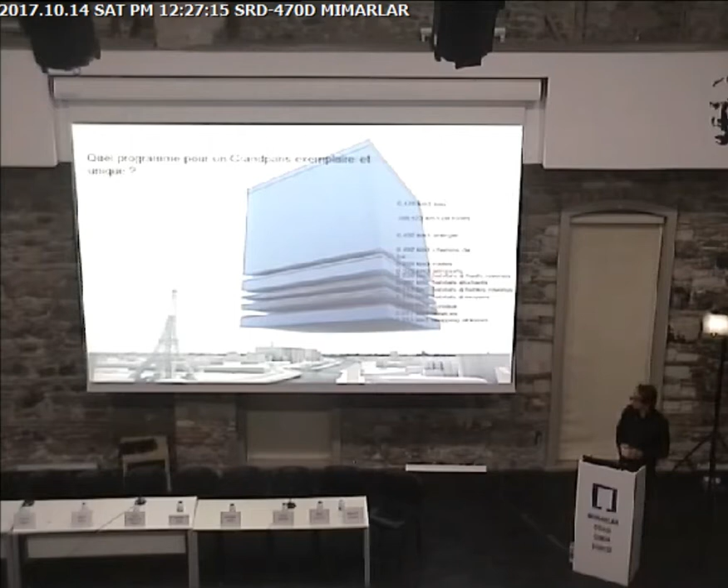So Sarkozy, the former president, came to us once to think about the expansion of Paris and what that could mean with 1 billion square meters of extension. Well, that's a large question, but it's maybe very relevant in your own context here.

So these were just a couple of suggestions, and then I thought further, what are other iconic buildings? Of course you have the Opera House in Sydney, or in Amsterdam we're trying to become iconic with this film museum and the former Adam Tower.

But actually Amsterdam, the urban fabric, as you showed before, I think it was you Meindert, is an icon in itself. So iconicity, or we make icons, you know, we create icons. Amsterdam is marketing 'I Amsterdam,' so you could definitely question what the icon means.

And in that context we're now talking to the municipality of Amsterdam to create another icon, which is a high-rise with the kind of symbol of the city. It's very bold. I'm not going to explain why, but it's interesting in this context to see if this will ever become the built icon of Amsterdam.

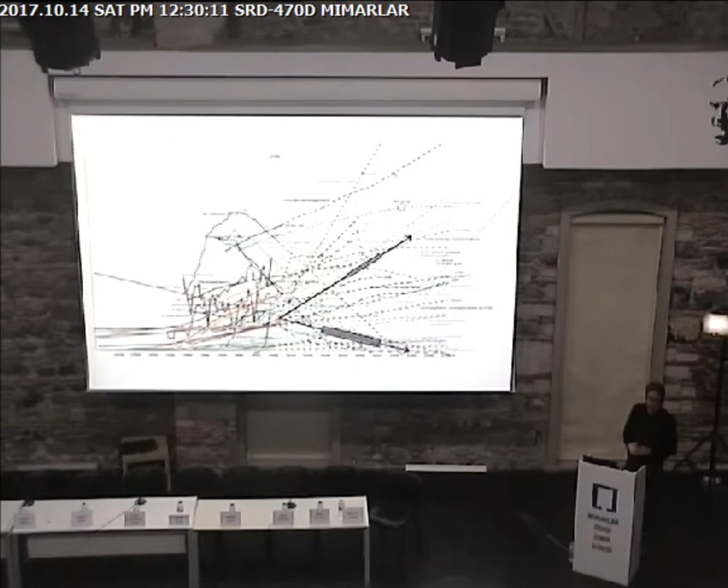I have to tell you why maybe we are making icons, and I think it goes back quite a while, where we did some research about what is happening to Earth in a way. If you look at the two arrows, what's going up is population growth, but what is going down is our resources, of course. So we are all aware of that, and in that sense that is a trigger to work with densification.

If we have the Earth and we all would live like a USA citizen, today we would already need almost 4.5 Earths. So that's part of a question mark for us, first of all to do research within densification and icons, and secondly to do projects that are based on it.

So we ask ourselves these bold questions like, what do we need to live actually on Earth, and how can that influence in the future perhaps a datascape of the built environment? Does the need for resources create our landscape or our datascape?

And more practically related to this is maybe the library issue in Holland, where there are so many scattered libraries over villages, and books are not being read that frequently anymore. There, let's say, there are copies of books everywhere, which is in a way an inefficient way of having them. For the province of Brabant, we once did a proposal to collect all the books and make a Brabant library, creating in a way an iconic building.

This is research, this is not a project. Sometimes renders are a bit confusing.

Similar to the pig city, one of these big questions for the Netherlands we're dealing with—we have more pigs than people, and they're all stuck in farms living in 1 square meter environments. So we did research on what if we have the inhabited pig city, which actually offers a living environment for this animal 5 times as large as in existing urban farms. However, yeah, well, that's it.

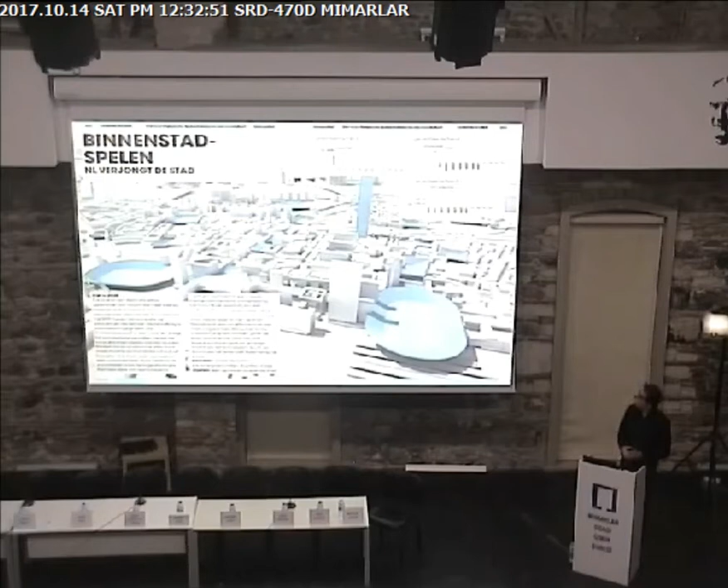Related to this rapid growth, architects working nowadays are confronted with large questions and large buildings, and clients ask you, can you make an iconic building for me? At the same time, the money is made in these kinds of developments all over Asia, which was a trigger for us to deal with its program, its questions, and to see how on a large scale we can diversify and mix and test what these kinds of programmatic uses can become.

This is just a study, but on a finer grain, one could say when you look at an urban fabric on a smaller scale, an icon is maybe one household, and it can be a collection of buildings. So this installation of the vertical village in Taipei is kind of a suggestion on how we can deal with densities. Do we really need to stack? Do we really need high-rises, or can we just densify in another way?

So I show you one project which is, I think, the iconic village. And of course we all know in China villages are wasted away, and you have now and then a stubborn person stuck there, but you could really question if the city districts are very livable. So one of our projects is the Bund in Shanghai. It's a very well-known location, situated between the upcoming CBD on one side of the river and the village life on the other side, with the site exactly in the center.

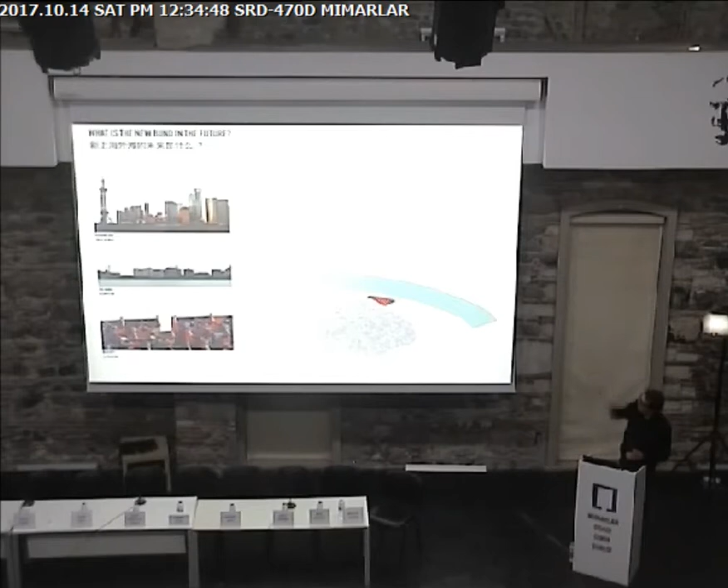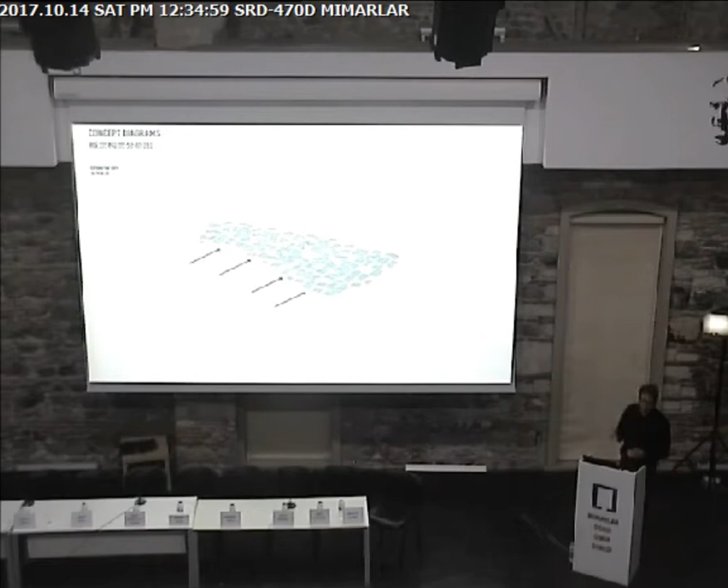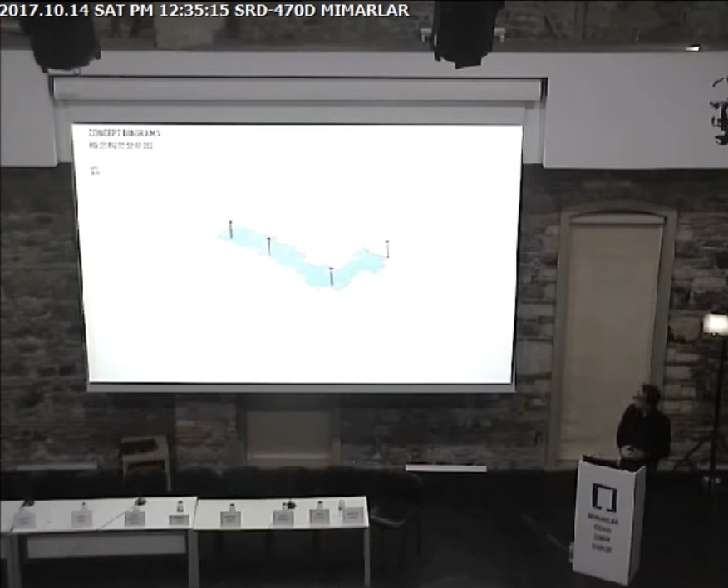Our approach was, can those two marry actually? Can we extend the village? Well, it doesn't give you the amount of density that is needed. But in a way, why can't you densify the village, and maybe extrude it, level it up, where there is of course a limit for daylight restrictions. So we might have to split and have a double village. Here we have a kind of marriage between the high-rise as we know it and the urban fabric on the other side. And of course this gives a spectacular view.

This was a real project. It was not a research project, but it became a research project because it was never built, for many reasons. But imagine city life like this.

So I go to another location, Jakarta. Jakarta is a city which is also rapidly expanding in many directions, and it has over 15 million people. So within Jakarta, we looked at what Jakarta consists of. It consists of different neighborhoods, kampungs, as they call it.

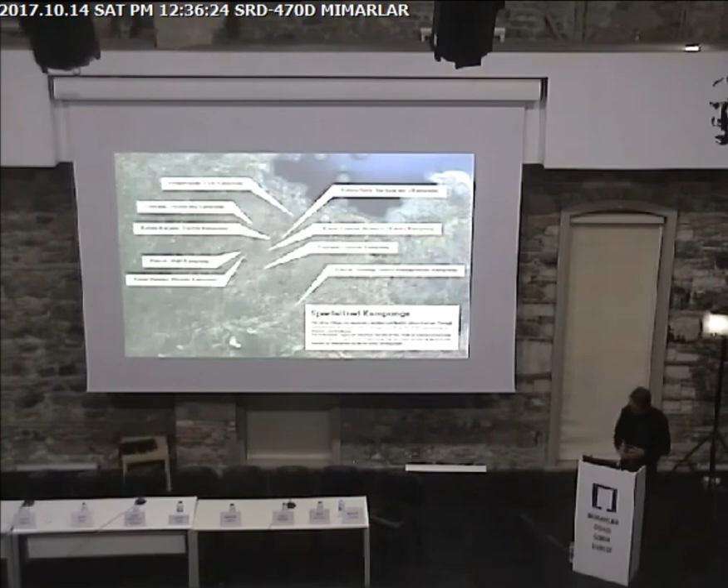So there is a fish kampung, which has its own microeconomy. Basically, it's a carpet, a tapestry of microeconomies. In the context here, this is their location. But in the context of Jakarta, there's also this redevelopment of the city with high-rises, etc., and that's what redevelopment is at the moment. It's replacing the urban fabric with its microeconomy. Here you see how they collide.

So we did 3 projects. I'm gonna ask you how much time I have still. Enough? Okay.

One is a vertical village, so city. So I was thinking, did we ever make an Eiffel Tower-like project? Did we ever propose it within the urban fabric, an existing urban fabric? So this is one of the proposals we're working on right now, which is a 450-meter high tower, a collection of towers. And I'll tell you why it is maybe justified to do this.

The former money printing company of Indonesia was based on this site, and it's secluded by large main accesses of Jakarta. When we looked at the site, actually there was no monumental value, only the headquarters of the money printing company. And as you can see, by regulation we already had to make an offset, so we would create a larger green zone. In the surroundings there are multiple buildings, there's a police station, there are multiple governmental buildings. So that's kind of the context we had to work in.

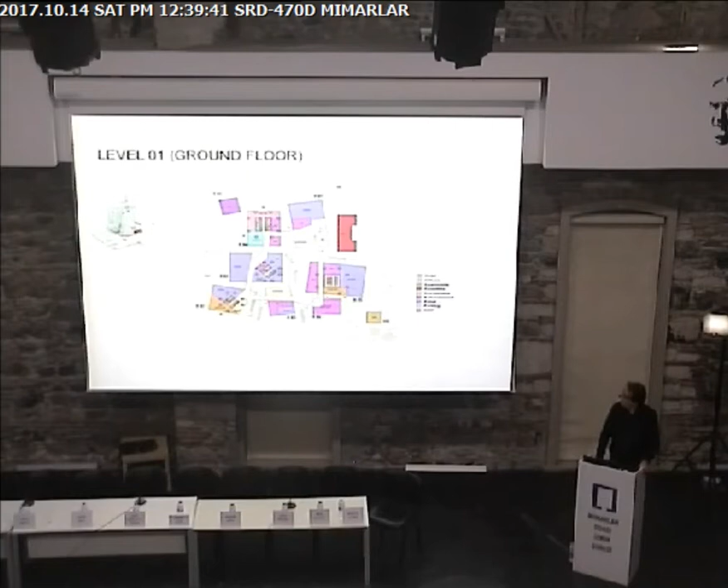And of course, we landscape the site. When you look at the roof plan, this climate fortunately allows on higher altitudes, as we know in Singapore very well, to have roof gardens. This is, I have to say, a vision. It's a first start of the project. We'll see where the budget brings us, but these are some impressions.

A tilted element, which is the cinema. But of course, this is a first attempt at a slightly finer grain of large-scale development. This would be open to air, the central plaza, and when you look up, you see how covered and shaded it is. It's a cinema complex higher up, with a diversity of housing typologies.

And from the hotel, one could look down. So this is maybe the kind of a radical proposal within an existing urban fabric.

So I would like to compare it a little bit with our second project, which is the Kemang, which is the vanishing village. It's somehow more refined, and I'll show you what was the trigger. We were actually in a kampong, in the middle of a kampong in Kemang, and it's a very lively neighborhood, very much appreciated by locals but also expats, and it has a huge variety of destinations, as you can see here.

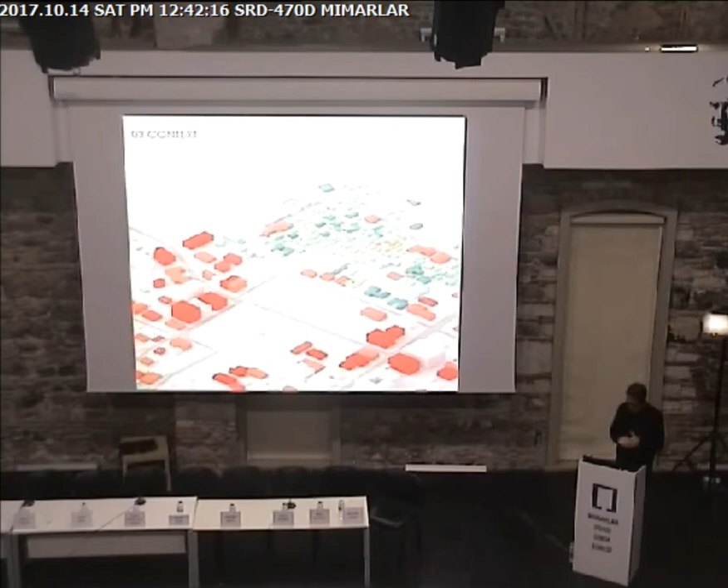So we looked at the blue as residences, the red as more hotels and retail and food and beverage. Can this be a collection that we use in a more dense way? So what you see is the tilted volumes, they are cinemas, and the loose elements are more food and beverage and retail. And they create in-between space, shaded space, covered, protected from rain. And one could imagine an interaction between inside and outside.

And then the tower itself, it starts with individual housing, individual living, and slowly vanishing to the top. And to top it off, there's a hotel function, and some exception for public uses. So overall, this is another mixed-use development embedded in the urban fabric.

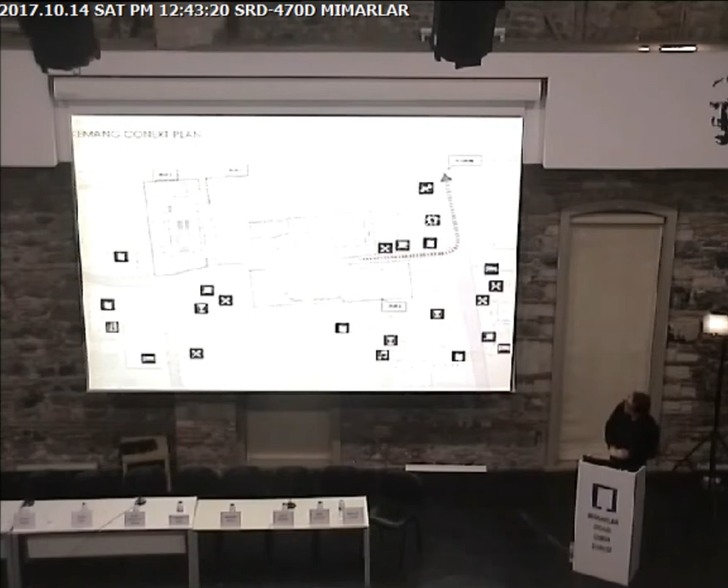And here the section very well shows, I think, or the elevation, I must say. So to show you here, this is the roof plan. I intended to show you the ground floor plan. I go one slide further. So in the ground floor, you can see what that means. Oh sorry, where's the pointer?

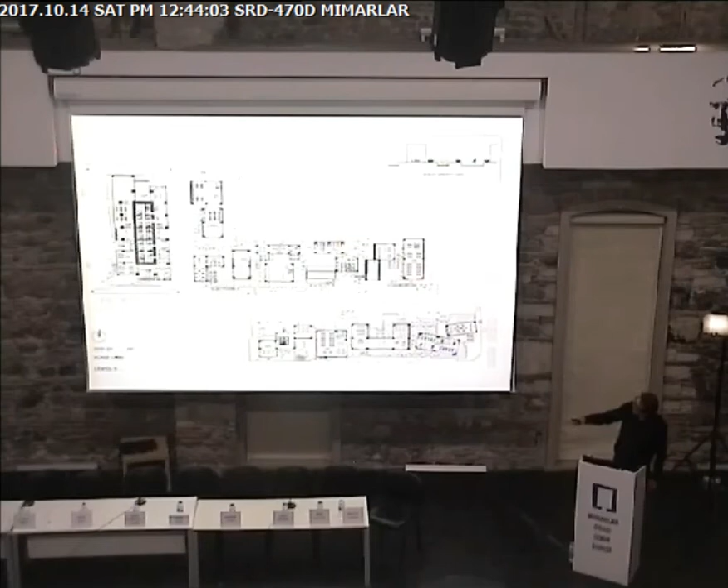So the in-between space between volumes is a landscape, basically, with water features and terraces, etc. So what we kind of create is another neighborhood district at grade level already, with actually commercial functions in the back, because it's the main street, and the same is on the other side. And the tower on this side lands as it is.

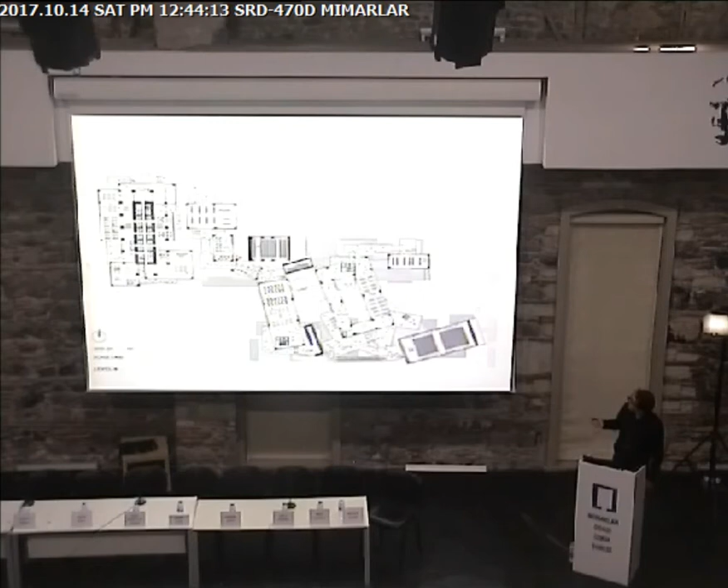And on higher levels, you can see the same happening. So you walk from inside to outside to inside to outside. It's kind of an experience within a city, and you're not staying within a building like in any mall as we know it. And on the roof, we have some urban farming. Of course, the climate in Jakarta is so humid and fertile that anything will grow.

And this is how your main point of arrival, on the left, the tower. And for example, here there's a cinema landing which gives you access. And this is this in-between space which can become very lively. This is outdoor. Moving up to the roof.

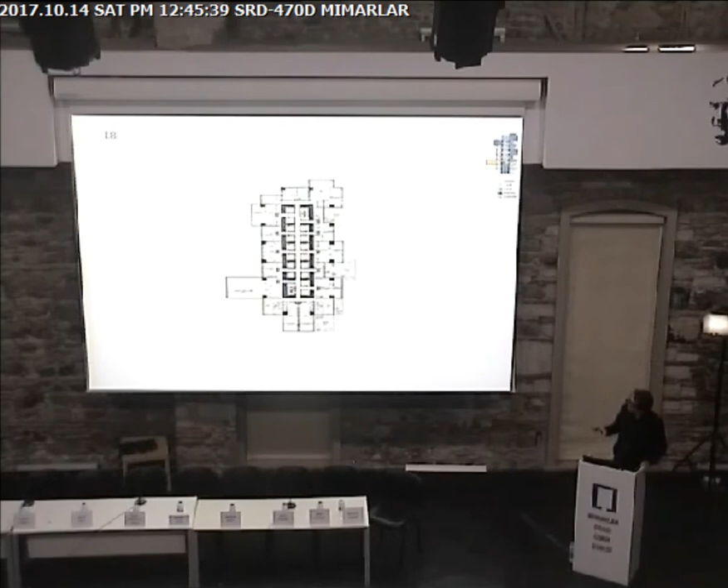And looking at the vanishing village, as we say, this is one of the floor plans. Maybe what you can see is what is, I guess, so beautiful about this kind of fine grain of pockets and cantilevers is that you create not only terraces, but you create corner views, cross ventilation. As you can see, these are very small apartments, more or less between 30 and 50 square meters each, and a heavy core, a mixed-use core, and some public outdoor decks.

I guess the nice thing about living in this tower is that you have an outdoor terrace, and when you walk outside and look back into your apartment and the building, you're taking part of outdoor life. Then there's the hotel, which is much more straightforward—at these altitudes, it's not very nice to live outside.

Okay, now I have two more minutes. I want to shift to one project—I knew from the beginning I had way too many slides. But I'd like to link to a project, because my key question is: what is an icon, and can it be a small building?

So I want to bring you back to Amsterdam, away from large developments, and dealing with the existing urban fabric. This is the P.C. Hooftstraat, one of the most expensive shopping streets in the Netherlands, surrounded by the Rijksmuseum, as shown before, and it's a main connection to our park on the left corner.

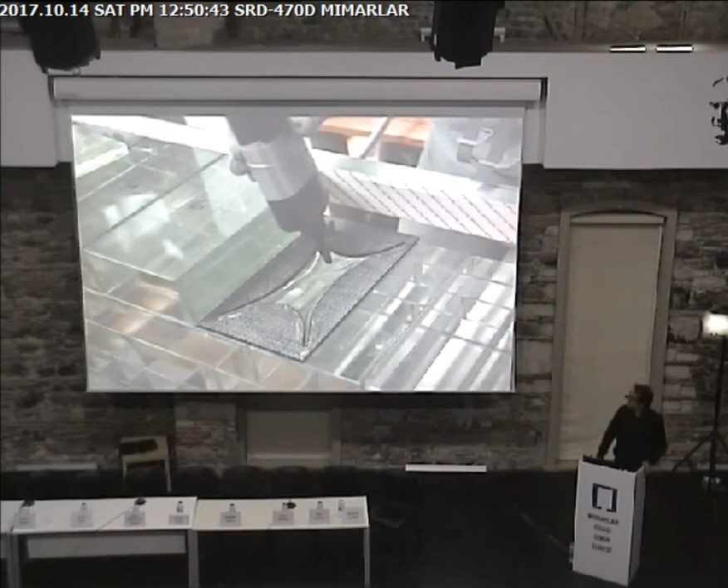So we went to Murano and did tests on glass with the Technical University in Delft. We tested it, created our own bricks, and found a new way of gluing them—you cannot just use cement. It's the same material you know from the dentist, the way you get your filling in your tooth. That's the way of gluing this facade together.

So I quickly wanted to show you this, where maybe the icon is in the detail, and these are the construction pictures. I really have to stop now. Okay, thank you.